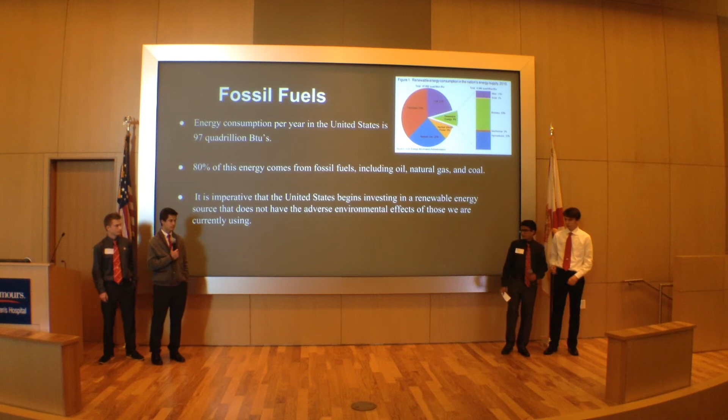It is imperative that the United States begins investing in a renewable energy source that does not have the adverse environmental effects of those we are currently using. So the question then becomes, what renewable energy source should the United States invest in for future sustainability? As we were doing our research, four major energy sources came to the forefront: hydroelectric power, solar energy, wind energy, and fuel cells, which are machines that generate electricity from hydrogen gas.

As we're looking into all of these energy sources, it's important to note different categories that distinguish each of these from each other and could say which are better than the other. One of those is how environmentally friendly they are. All of these energy sources are considered clean, meaning they don't create any pollution in their use or after construction.

Fuel cells are the worst of these. They generate 325 grams per kilowatt hour of CO2 in their construction. That means their construction requires the use of machines which run on fossil fuels, and the fossil fuels then release CO2.

Hydroelectric is technically the second least at releasing CO2, but hydroelectric power comes with other pollution issues. When you make a dam, you restrict water flow down the river, so there's an increasing concentration of salt and toxins, which is harmful for aquatic life downstream. Upstream from the river, there's an increase in sediment buildup, and when that sediment builds up, it can build up toxins also in the sediment, and these toxins can leach into the groundwater, causing groundwater pollution.

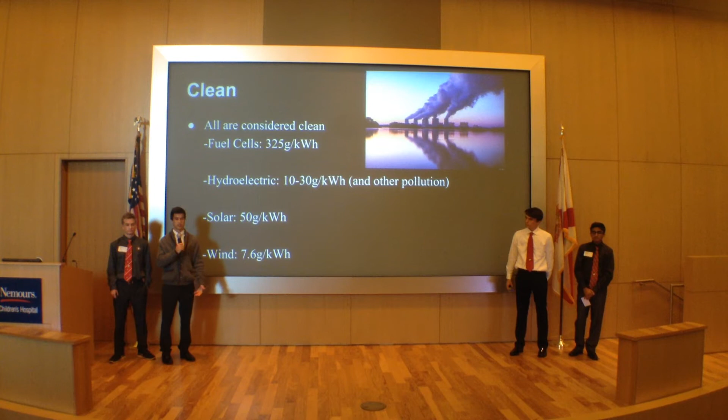As Tate said, when researching these energy sources, you need to keep in mind many aspects of them. One of these is cost. When examining the cost, we need to make sure that the yield provided by the energy source is enough to cover what the people are paying for, making the energy source a cost-effective one.

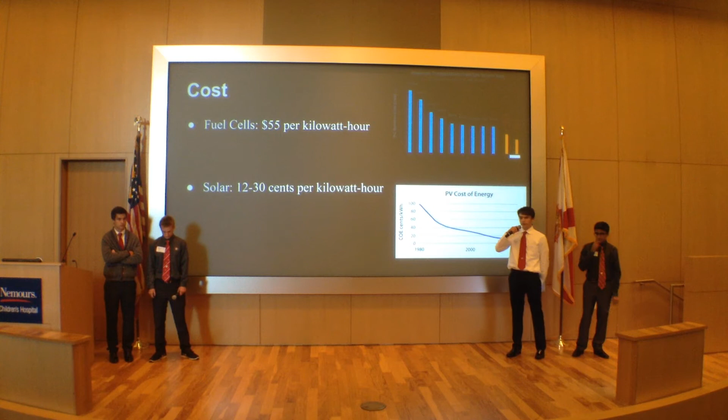As I began my research, I thought hydroelectric would be the cheapest since we have been using it for years. When I researched, I found out fuel cells are the most expensive, costing $55 per kilowatt hour. But the technology is advancing and the price is dropping regularly. Solar energy costs 12 to 30 cents per kilowatt hour, making it very cheap, but the technology does not yet exist to make this a cost-effective energy source.

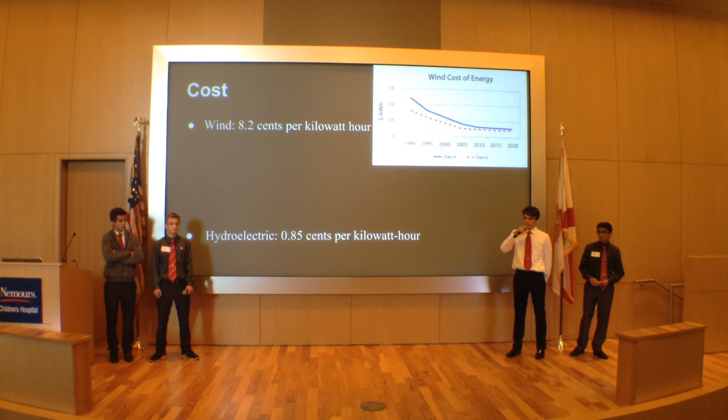Just like solar, wind costs very little, but it's also not advanced enough to be cost-effective. Hydroelectric, as I believed in the beginning, is the cheapest, costing 0.85 cents per kilowatt hour. This is due to advancements in technology, and the price is not going to drop as significantly as the others due to the fact that we have been using it for years. When examining the cost, it's important to keep in mind various aspects of them, but we also need to research the efficiency of them.

To be efficient is to be capable of producing without wasting time, energy, or materials. There's no point in investing in a renewable energy source if it isn't able to satisfy the United States' needs.

Hydroelectricity uses 90% of its available energy, producing only 4 kilowatt hours per square foot per year. Solar energy lacks the technology to be an effective, efficient source, producing 5.7 kilowatt hours per square foot per year. Wind produces 9 kilowatt hours per square foot per year, due to wind being extremely unpredictable.

Going into this project, I thought fuel cells would be the most efficient of all the renewable energy sources, and it ended up being true. Fuel cells produce 4,500 kilowatt hours per square foot per year, due to producing electricity chemically rather than by combustion.

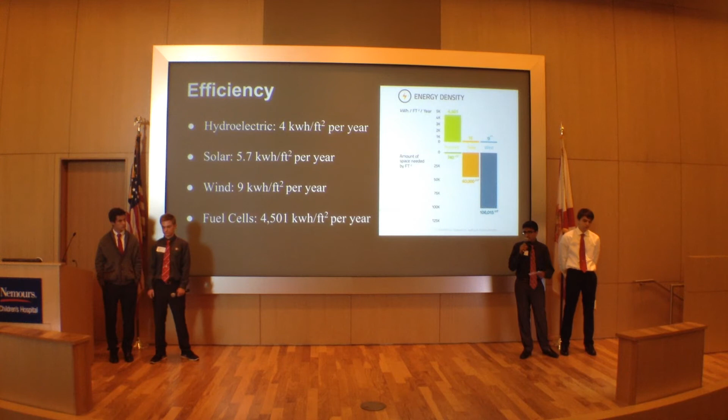Efficiency is a very important category when determining which energy source would be most beneficial to invest in for the future. But another major aspect of each of these sources is their potential.

Currently, hydroelectric power represents 6.6% of all electricity generated in the United States, and has the potential to generate up to 15,000 terawatts per hour. It can do this by adding new turbines to pre-existing dams, building new, more productive dams, and producing high numbers of smaller scale hydro plants.

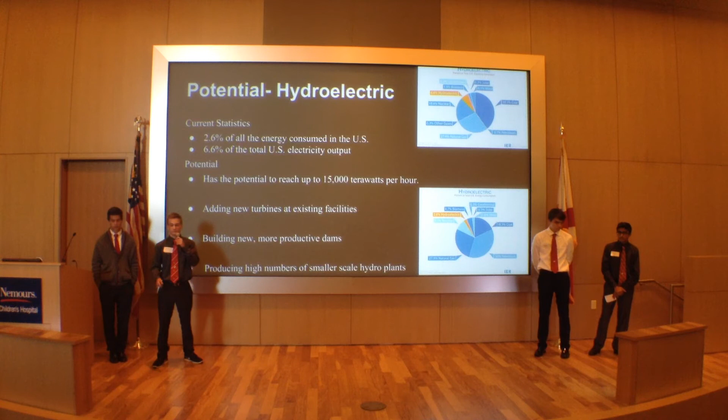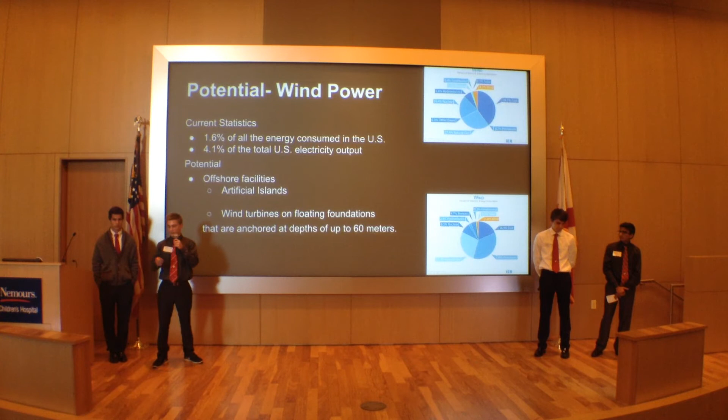Wind power currently generates 4.1% of all the electricity in the United States, and its potential can be maximized offshore. These offshore facilities give wind turbines access to more reliable, constant, and stronger wind, and there are many new methods of offshore facilities being developed by scientists, including artificial islands with wind farms and turbines on floating foundations in the ocean.

Currently, solar power represents 0.2% of all electricity generated in the United States, which is a surprisingly low number. However, the potential for solar power is very high.

Scientists are currently developing a new method of solar power called thermodynamic solar power plants, which are predicted to surpass photovoltaic cells very soon in production. These power plants can generate up to 270,000 megawatts per year and are much cheaper than photovoltaic cells due to the price of silicon.

Fuel cells at this moment do not take up a significant amount of electricity generated in the United States. However, they have an infinite amount of potential, because as long as the necessary amount of fuel and oxidants are supplied, they can run potentially forever.

When I first started this research, I thought solar would dominate the potential category because the energy we can gather from the sun is obviously infinite. However, I greatly underestimated fuel cells, because they can also run infinitely and they produce a lot more megawatts per year and per hour than solar power.

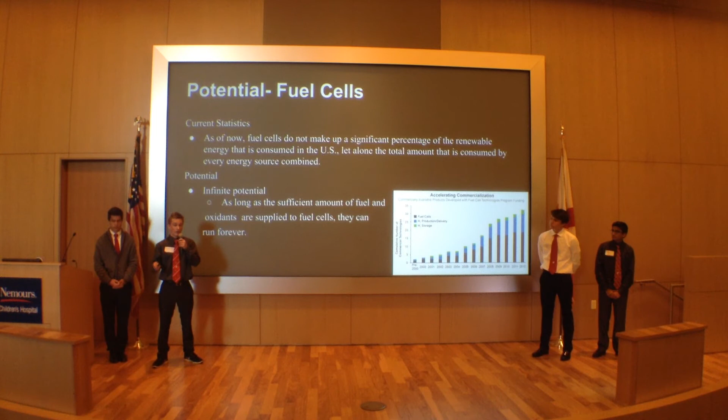There are a lot of other advantages and disadvantages to each of these energy sources that are miscellaneous, that don't fit into any of the categories we've discussed so far.

One disadvantage comes with solar, and that is that solar's efficiency is actually cut in half because the sun only shines for half the day. So because of that, we can only actually harness solar power for half of the day.

Another con that comes with wind turbines is that they basically commit bird genocide. Wind turbines are responsible for the death of 140,000 to 328,000 birds every year, and this massive amount of aerial death is having detrimental effects, wrecking ecosystems across the nation.

An actual advantage that comes with hydroelectric is that the dams create lakes behind them, and these lakes can be used for recreational activities for people who live near them, including swimming, boating, and fishing.

Fuel cells come with the best added benefit, which is that they can support transportation needs. 28% of United States energy consumption is in the transportation sector, and this is a massive need that really needs to be met, one that can't be met by any of the other energy sources.

Fuel cells can actually provide energy that can be used for transportation, which is a really key factor to bring in. Fuel cells can also provide extra energy, because when you have a fuel cell power plant, it creates heat, and this heat can be harnessed by heat pumps by way of a gas turbine to generate electricity, which makes it even more efficient because it's creating extra energy.

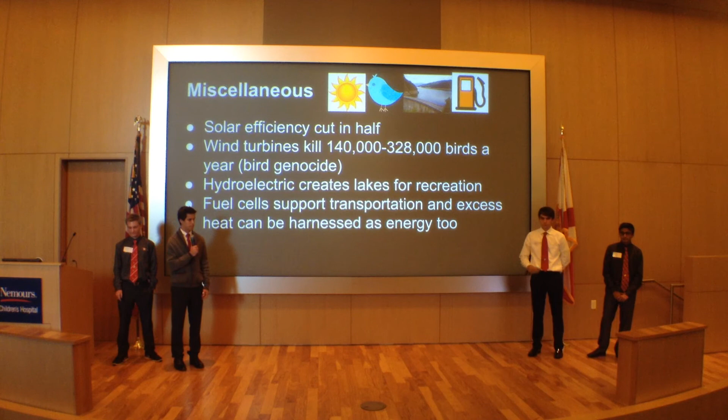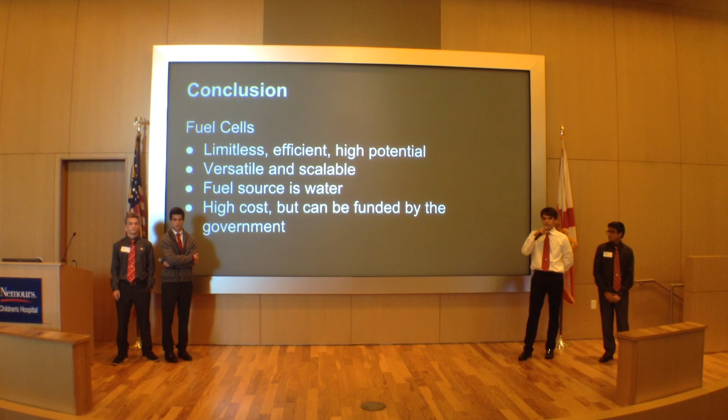So as we researched individually, we grew, but in conclusion, as a group, we reached that fuel cells would be the best energy source possible. Not only are they limitless, since they run on water, they're efficient and have high potential. They're versatile and scalable, and their only bad thing is the cost of them. So in conclusion, we think fuel cells are clean, affordable, and could provide enough energy to suffice the U.S. needs, and will send the United States into an age of renewable energy. Thank you.

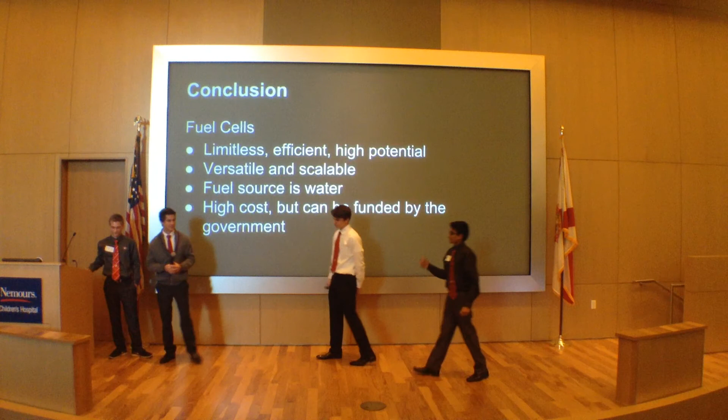When you guys started off this process, how did you select the different strategies that you were going to use to gather or conduct your research?

So basically, in the beginning, we each researched a different renewable energy source. For example, I was wind, he was hydroelectricity, he was fuel cells, and he did solar. We all tried to research efficiency, potential, and cleanliness. Once we combined them, we separated into four other categories such as efficiency, potential, cleanliness, and cost. That's how we all came together as a whole to make this presentation.

All right, thank you. What information did you need that you weren't able to find? And then tell me what you did to try to find it.

I was researching potential specifically, and a really hard thing to find was the information on fuel cells. The really bad thing was that most of the fuel cell sources we were able to find were from companies that actually produce fuel cells, so the information was really biased. But eventually we did, and we talked to our AP Environmental Science teacher about some of the statistics of fuel cells and their potential. So that's some information that was pretty hard to come by, but we ended up doing it, and I think it was reliable.

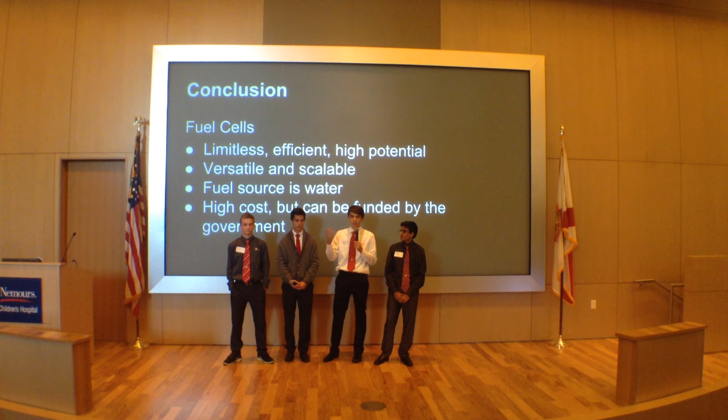So, as I said, I thought hydroelectric would be the cheapest, and it turned out that it was, but I believed solar energy would be the best one possible, because it's shining every day and we can create energy every day. But I didn't know fuel cells could potentially be limitless, because the technology to inform us about that didn't yet exist. But as we researched, we began to learn that fuel cells are limitless and very clean, and their only bad thing is cost, and that's what made me change my mind on what the answer would be.

All right, thank you guys.